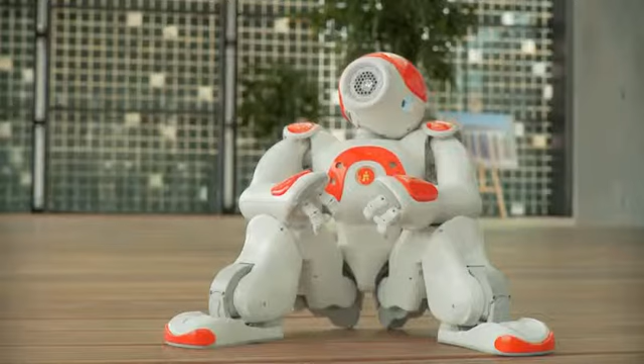I want to come with you.

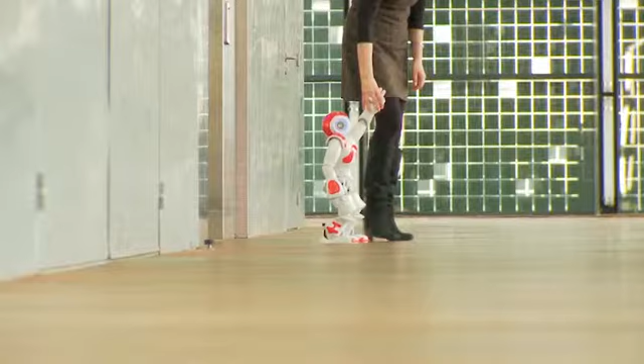Our goal with robots is to have robots helping people, and not only the geek. I want to have robots helping everyone. But in order to do that, we need to have the robot accepted by people.

I'm Bruno Maisonnier, head of Aldebaran Robotics, founder and CEO of the company. Give me something, please.

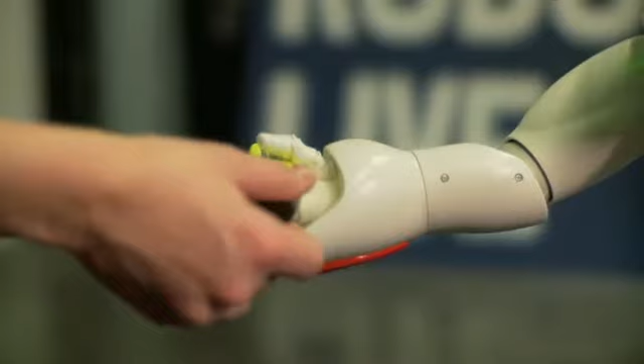We think that the robotic market is going to be huge in the future. And this comes from the simple fact that the world population is aging very fast. And we need robots to do whatever they need at home.

What do you want me to do? When people are depending on someone else and need to have someone else helping them, they are in a secondary position. But when they have a robot doing that, they are in the first position. They are leading.

Notre Dame University in the United States, they are really working with robots helping autistic kids. So we discovered that robots are objects they can interact with, they are comfortable with interacting with robots, they like it.

The first impression that you get when you see the robots is the outside shapes. If the shape, if the form is too aggressive, you won't interact with that robot.

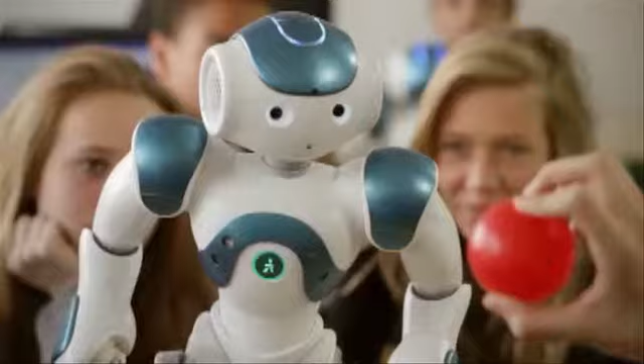There are many people ready to develop softwares, but we are just lacking robots. We are just missing robots. So that's why Aldebaran began with a platform for providing all those who want to explore this new world, who want to be part of this revolution, to be able to do it.

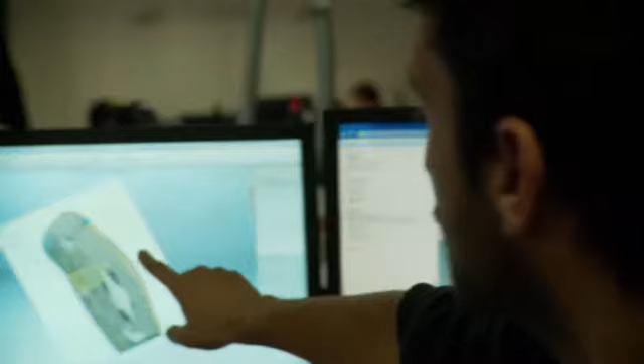I've been working for Aldebaran Robotics for 5 years as a mechanical engineer. I especially work on designing gears and integrating motors into the platforms we develop at Aldebaran.

Well, like Ludovic, I am also a mechanical engineer. I mainly work on the shells, but also on internal parts and the structure.

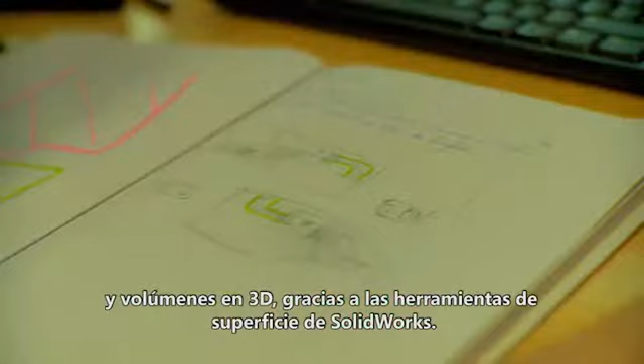For each project, the process is similar. We start with sketches, essentially 2D images, that we then translate into digital data and 3D volumes using SolidWorks surfacing tools.

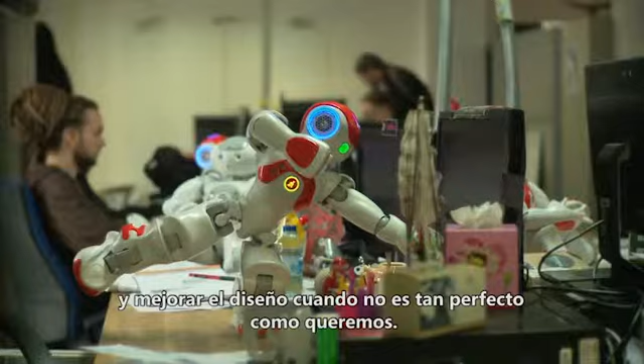This gives us the ability to rotate the pieces and robots in the space and to improve the design when it's not as pure as we want it to be.

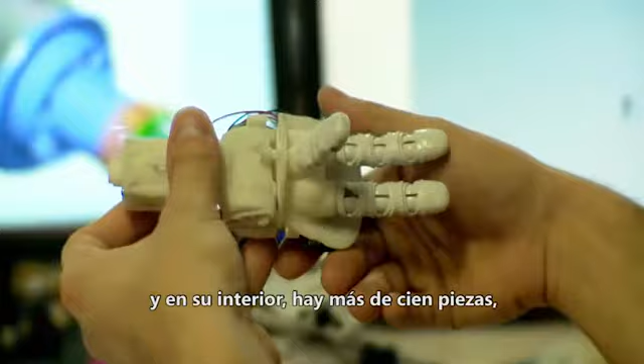So we start with the exterior design of the hand as we have here. It is smaller than a human hand. It's the size of a small child's hand. And inside there are over 100 parts just for one hand.

In addition to all mechanical constraints, we have 2 degrees of freedom that we have implemented in this hand, and SolidWorks allows us to look at all the possibilities and optimize the mechanical design inside the hand.

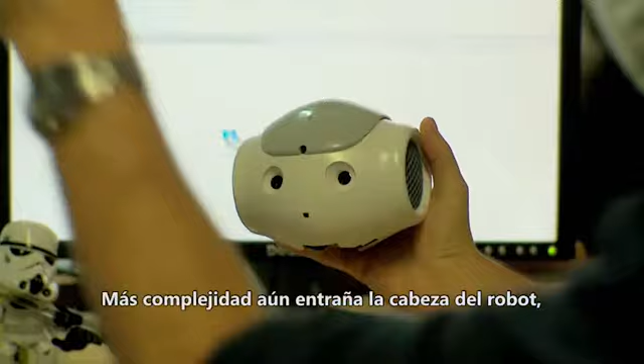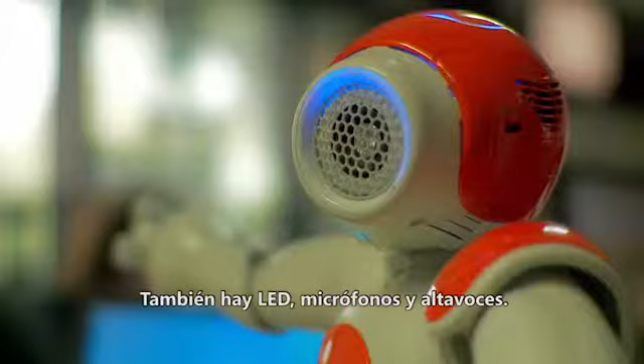Even more complex is the robot's head, which combines mechanical, electronic, and optical components, like cameras, for example. One might say that all NAO's intelligence is gathered in its head. There are also LEDs, microphones, and speakers.

We use SolidWorks simulation, which allows us to generate digital models and know if the part will resist to shocks or not, based on stresses we apply to it. And once we have proceeded with validation in SolidWorks, we can move on to production.

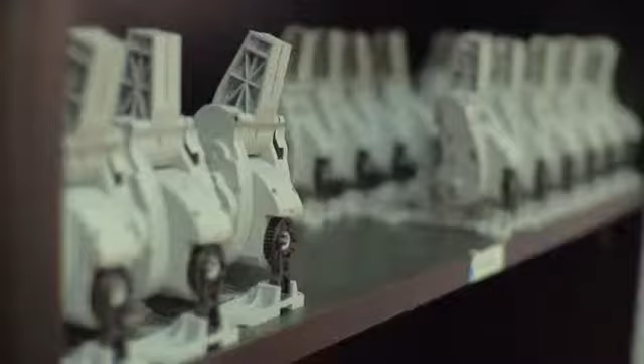We use SolidWorks in order to project the product into the future, and we can really optimize, really improve the parts before it exists, before it is manufactured. You have to know that into that robot there are more than 1,200 plastic parts.

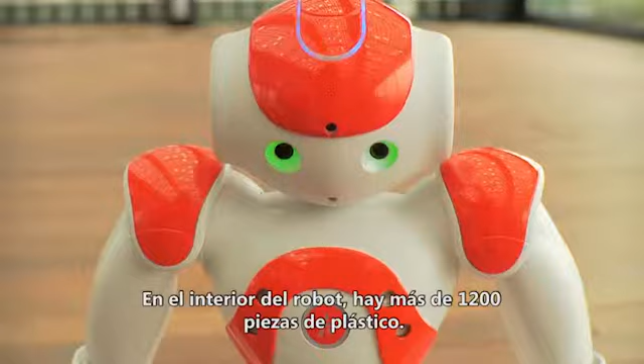On my team, there are 45 people working on the design, and I need to orchestrate the daily work and make sure that when we create new parts, the version is correct. So for that we use EPDM, and it helps us to focus on innovation while EPDM is taking care of the structure of the project.

I hate the techno stress. I don't want to have devices that are asking me to invest intellectually to understand how they're working. So I don't want my robots to create techno stress to people.

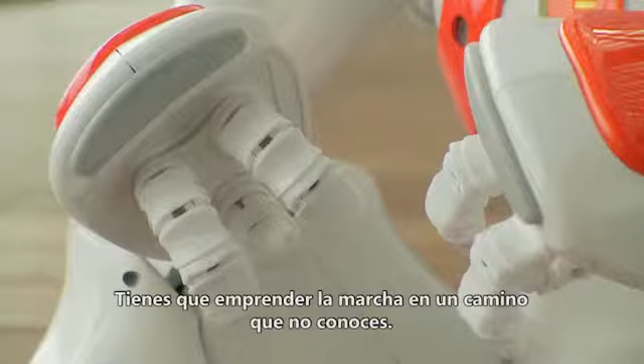When you want to change the world, to improve things, you have to go beyond what you are able to do. You have to decide to go for something you don't know how to do. It's a new territory to conquest. Shall we try something new today?